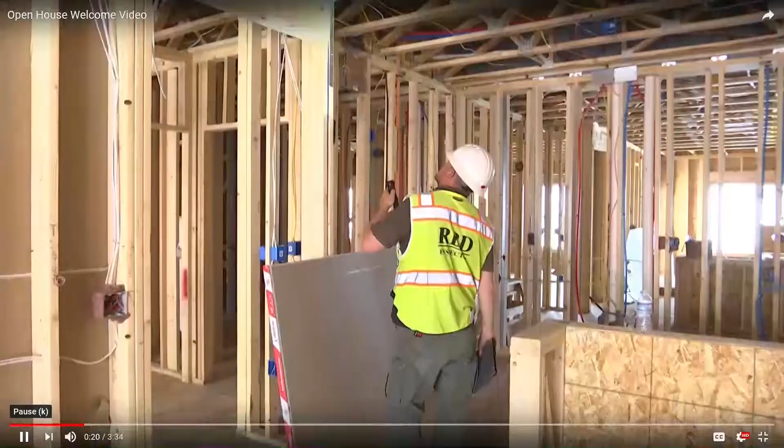PPRBD was started back in 1966 by an intergovernmental agreement, or IGA, between El Paso County and the city of Colorado Springs. As the Pikes Peak region grew, so did we. Today, PPRBD not only services El Paso County and Colorado Springs, but Fountain, Manitou Springs, Monument, Palmer Lake, Green Mountain Falls, and the town of Woodland Park in Teller County.

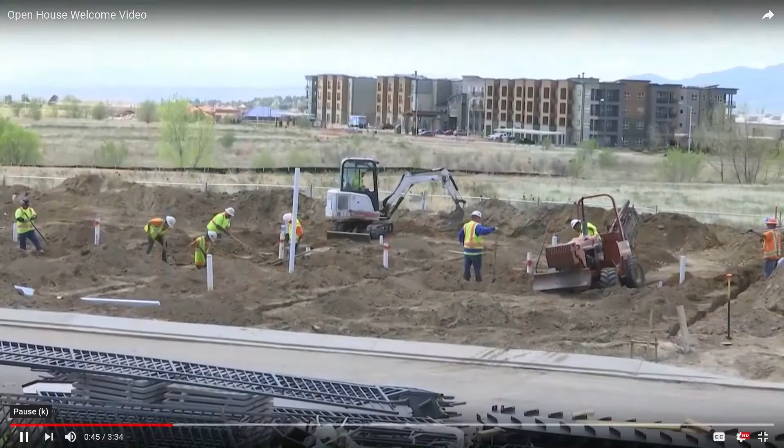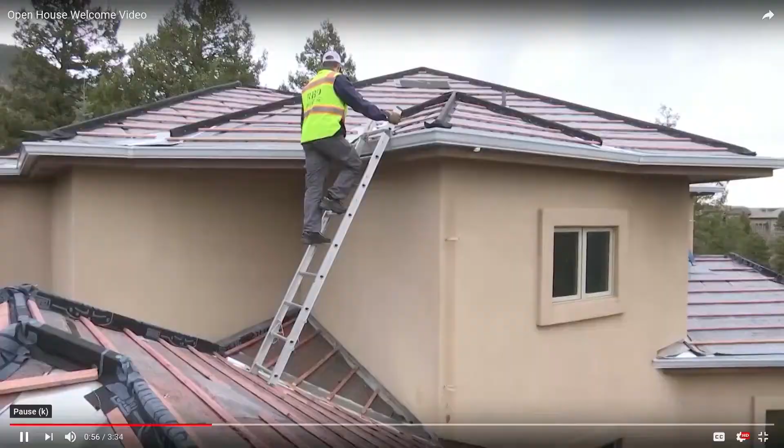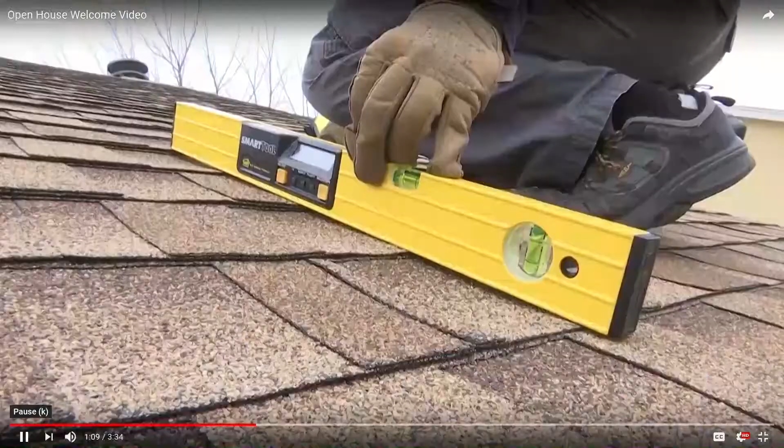So what do we do? Well, we make sure contractors have the proper licenses to do work here in the Pikes Peak region and ensure all work is done in a code-compliant manner, from plan review and permitting to new construction, remodels, and re-roofs. Our goal is to keep our citizens safe through efficient and the consistent application of adopted codes and standards. We do that by reviewing and inspecting the design, construction, quality of materials, use, and occupancy of all buildings and structures under our jurisdiction.

One of the best things about regional building and the way that regional building operates is the same codes are in place all throughout El Paso County, and the same expectations occur all throughout El Paso County. So it doesn't matter where a building is built, whether it's in the city of Colorado Springs or way out east on the plains, the same criteria applies and the same level of expectations and service is there.

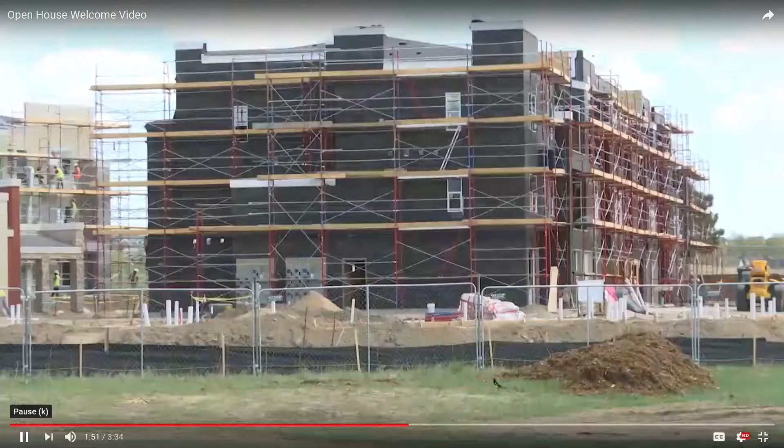The department is governed by the Regional Building Commission, a 3-member governing body consisting of 1 county commissioner designated by the El Paso County Board of County Commissioners, 1 council member designated by the Colorado Springs City Council, and 1 elected official chosen by the other member jurisdictions served by PPRBD.

Probably one of the biggest misconceptions about regional building is that we are the city or we are the county and that we get tax funding. That's actually not the case. We aren't the city or the county. We are a separate entity and we don't receive 1 dime of tax money. Instead, the department is completely funded through permit, plan review, and license fees.

With that said, we are proud to say that our fees have not been increased in 11 years, and we have some of the lowest building fees in the state of Colorado. In fact, when it comes to single-family homes, we have the lowest fees in the state, and compared to most of the other building departments, it's not even close.

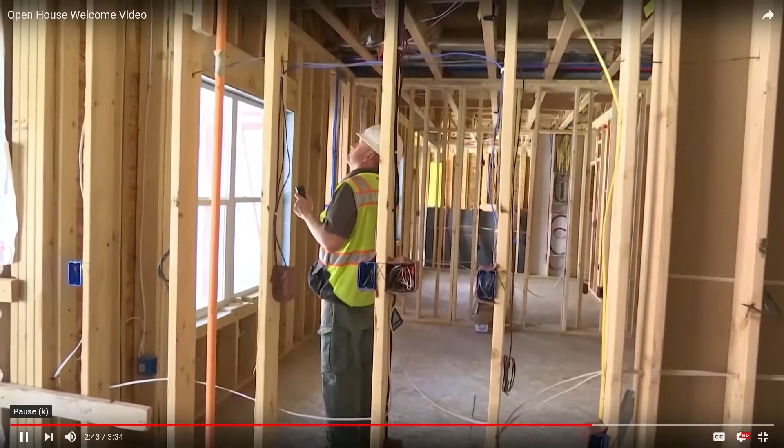Our low fees allow people to build and construct things at a reduced cost, and we've been able to increase efficiency throughout the years to be able to match the revenue that we receive. And the fact that we can offer outstanding service at a reduced fee over other building departments just makes us that much better, and we're very proud of that here at Regional Building.

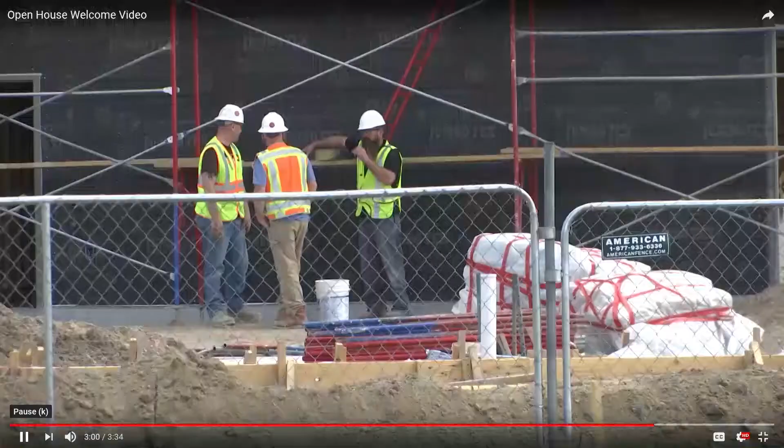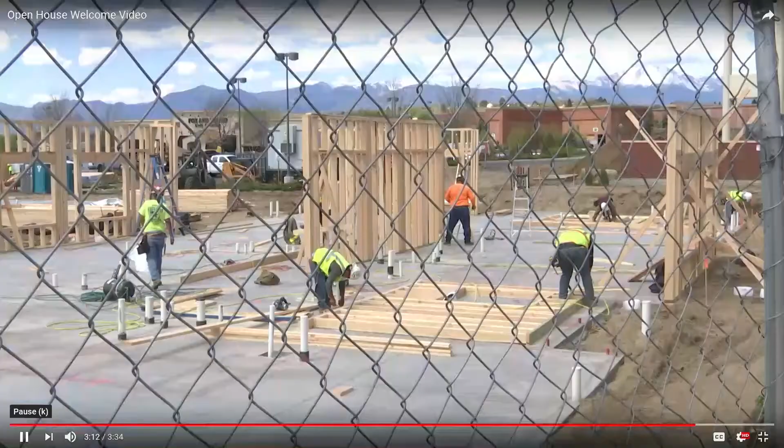It takes everyone in the community to keep our homes, schools, hospitals, offices, retail stores, and other buildings safe for public use. Building codes and safe construction practices help make it all possible. We hope to build on those safe practices today through education. The more informed homeowners and contractors are, the smoother the building process will go and the safer our community will be.

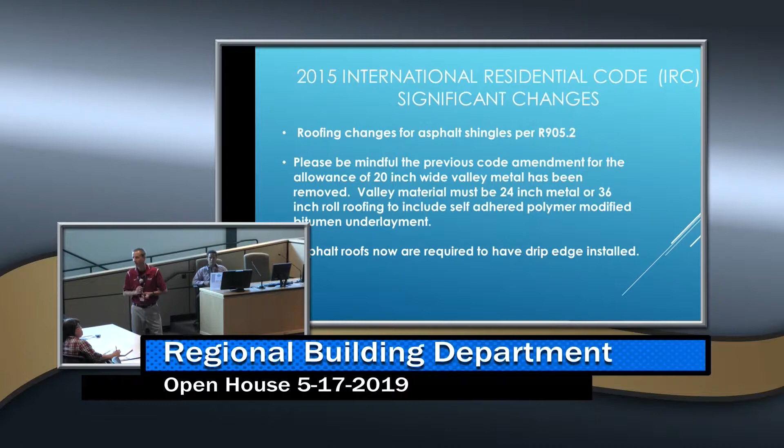All right. So here's my segue over to Jack. One of probably the biggest changes on our end with this most recent code adoption that impacts 1 and 2 family homes is this is the very first time that regional building has adopted IRC chapters 13 through 33.

So previous to this code, you would have built the house with the 2009 IRC. You would have put in your mechanical per the 2009 International Mechanical Code. Your fuel gas would have been regulated by another book. Plumbing would have been regulated by another book. This way, it's self-contained.

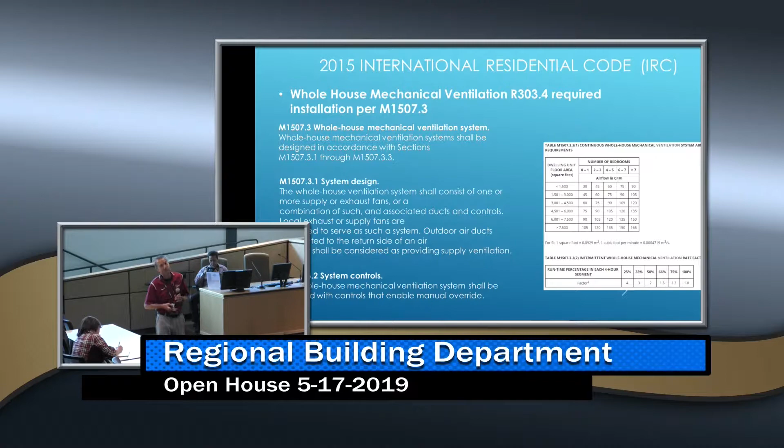Everything that you need to build a single-family home, with the exception of the energy code, is in one book. Hopefully, this has streamlined the process and made some of the requirements for single-family homes not as laborious as trying to build a commercial project. So with that in mind, I'll turn it over to Jack to cover some of the more significant mechanical changes.

Okay, one of our big changes on mechanical going to the IRC was the whole house ventilation system, which seems to... is figuring out how we want to do this whole house ventilation system. It can be done with exhaust fans, or it can be done with makeup air or intake air to the return on your furnace system. So you have a couple of choices. We're seeing it done both ways. We're seeing more of the intake into the returns on the furnace.

If you do a 6-inch outside air into the return on your furnace, that counts as 90 CFM for your whole house ventilation air. The other part of that is you have to have a switch, a system control, as you see from the comment at the bottom there, to shut this system off. We get a lot of questions about that control.

One of my senior inspectors came up with one of the best reasons for having that control. We had the fires here at one time in Black Forest and over here on the west side of town. If you had that whole house ventilation system as an intake and you're sucking that smoke in, you might want a way to shut that off while that fire's going on, you think?

I used to tell people that one of my reasons that you might want to do it was to match what old code was. Your whole house ventilation used to be just windows that you could open. But you had the option of shutting your windows. You didn't have to leave them open all the time. So to me, kind of the same difference.

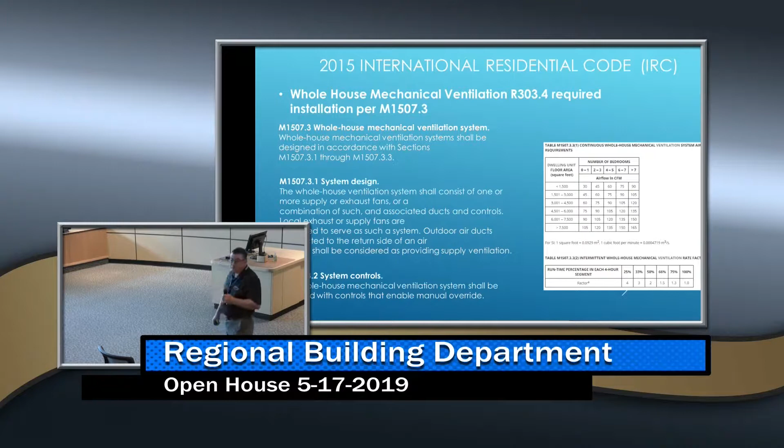Now again, that can be done with that makeup air into the return, or it can be done with exhaust fans. We have some contractors who are using the exhaust fan in a laundry room or a central part of the house that does the amount of CFM they need to do the whole house. And then they have their control for that fan with markings on it that says whole house ventilation control. And that's allowed, and it's all exhaust then.

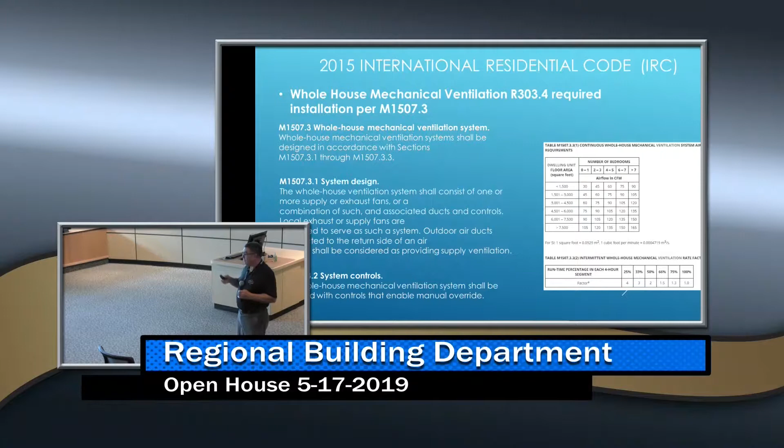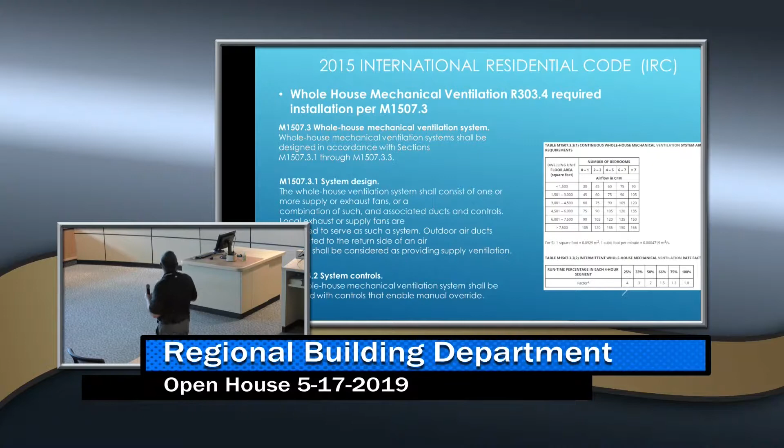Or you can mix them up. You can have part of it done by exhaust and part of it done by makeup air. If you get a house big enough where you need it all, you can do it that way. There is a chart up here. I'm sorry, I'm having a hard time getting in a spot where I can see this up there.

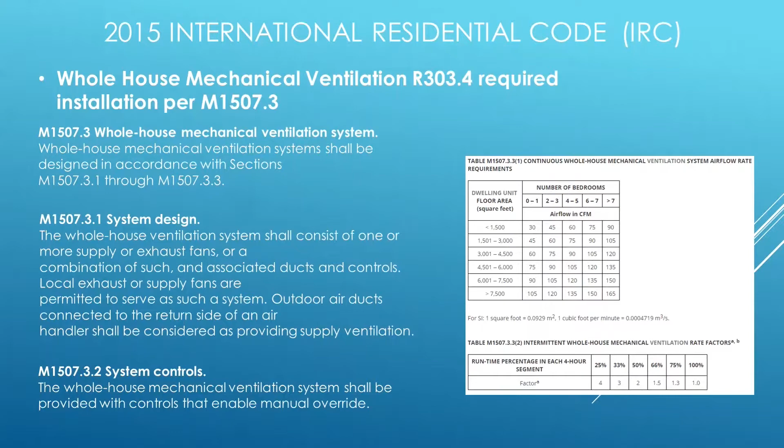This chart is in the International Residential Code, and it gives you the square footage of the house and the number of bedrooms, and then how many CFM you've got to be able to move to meet your whole house ventilation. And it's a small number if you're going to run it full time, and that's the way most people are putting it in. Now, you can put it in as an intermittent system and control it that way, but then you've got to use the bottom part of this chart and do your multiplication of what you're trying to get on those.

If we took a house in that 1,500 to 3,000 square foot area with 2 to 3 bedrooms, we would have 60 CFM we've got to move. But if we only wanted to run our whole house ventilation system as an intermittent piece for a quarter of an hour out of each hour, we'd have to move 240 CFM. Whereas we could put a fan in that moves 60 CFM and leave it run all the time, and then if you wanted it off, you could shut it off with the override switch.

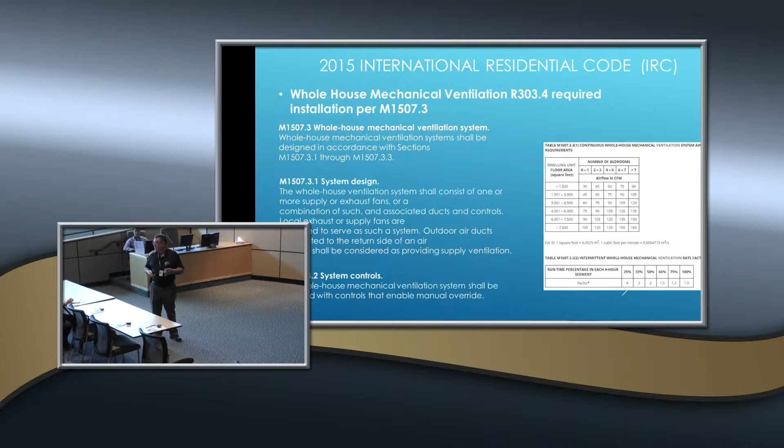So this has lots of options in it that you can use. And I think most of you have gotten that figured out now pretty good. We're not having quite as many questions on it because we've found ways to make it all work out for you. Are there any questions about that? I like that because that usually brings me a lot right there. So

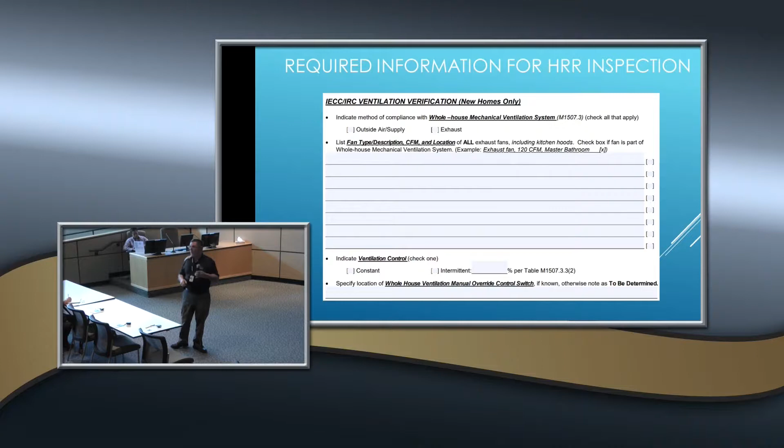Now, you're going to have more fans than that in your bathrooms and stuff, but we need those CFMs so that our inspectors can look at that when they're out there inspecting that house, because you've got to size those ducts by the CFM of those fans. So when they're looking at the duct sizes, if they don't have this sheet, they're going to have to partial your HRR, and then you're going to have them called back another day, and that just slows your job down, and we don't want to do that. So by filling this out, it may gain you a day on inspections, keeping that job moving. Because we like to see that job move forward too. We're really not in it to hold you up.

Down at the bottom of this, we want you to indicate the ventilation control, if you know. Is it going to be a switch in the basement? Is it going to be a switch upstairs? Is it going to be in the coat closet? We want to know where it's at if you know. If you don't know, just NA it, and we'll be asking as we go along where that's at, and we'll have to know by final where it's going to be, that main control switch to turn the whole house ventilation system on.

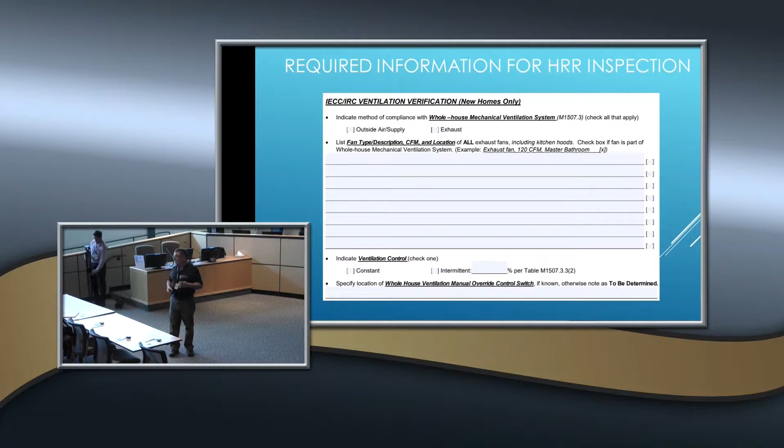And we ask you to mark, is it going to be a constant or an intermittent? And again, most of what we're seeing is constant. Any questions? Okay.

The next thing is the clothes dryer. This ran into an issue when we first started into this new code adoption because we were asking for fasteners on putting that duct together for the clothes dryer. A lot of you didn't like that because trying to find a screw 1/8 inch long was basically impossible. 1/4 inch long was impossible. We found out the shortest you could get was 3/8. That's going to go into that duct a little more than 1/8 of an inch. So you could use the pop rivets, but not very many people like using pop rivets anymore.

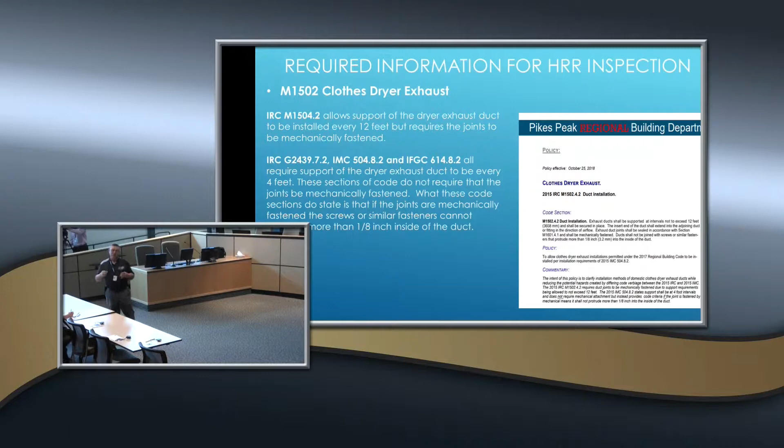So we got this study in code, and we found that the mechanical code and the IRC had a conflict. So we made a policy, and this policy is on our website. The policy simply gives you a choice of using one code or the other. If you use the IRC, you're going to go at 12-foot intervals on your supports, and you're going to have to fasten your joints. If you use the mechanical code, you're going to go at 4-foot supports, and you'll have to use no fasteners to fasten the duct, just the tape and/or mastic, whichever you use.

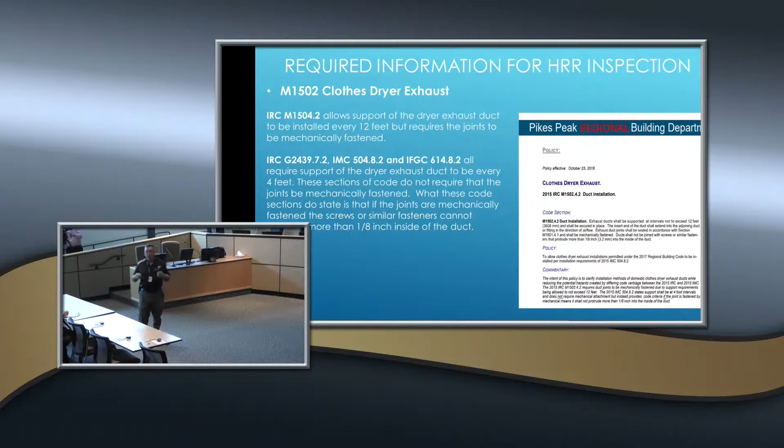Essentially, all it did is put you back to where you could do it as you were doing it in the 09 code. So you don't have anything different on it. You support it every 4 foot. Don't use fasteners on the joints. Just tape it. You've got to tape or mastic either way you do it. But if you do 12-foot supports, you will have to put screws or rivets in those joints for us.

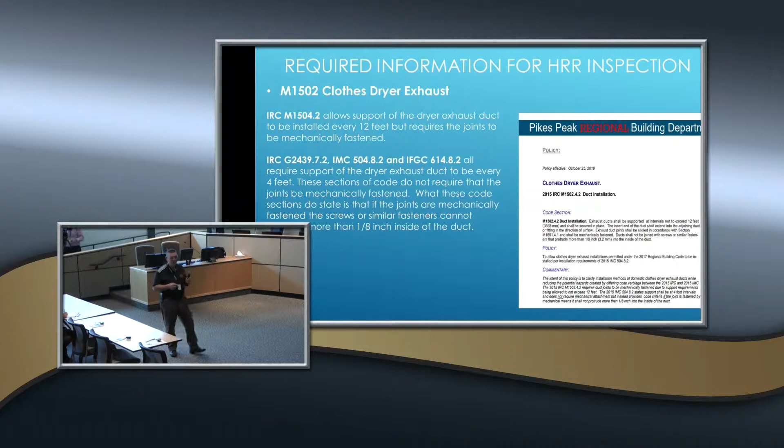Yes, sir. So you are allowing the 3/8 screws, is that correct? You can use the 3/8 screws if you want, yes. If we went the IRC method at 12 feet, you're going to allow 3/8 even though it's more than 1/8 into the pipe? Yes, sir. It's the shortest you can get. Any other questions?

Oh, John has this thing real fancy, and I'm not a fancy guy, so you'll have to bear with me.

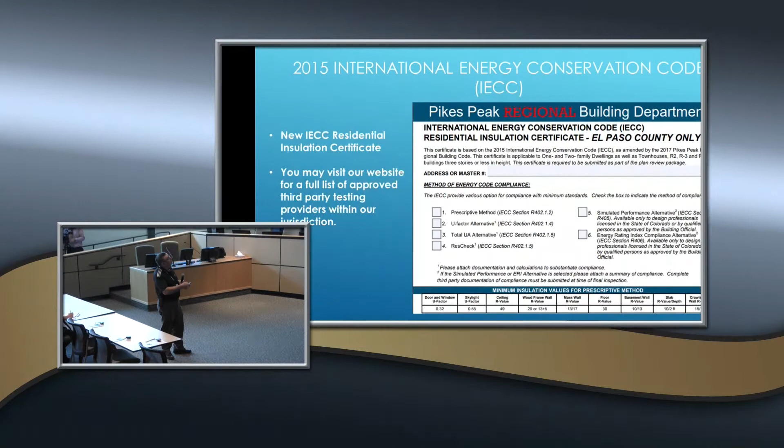You're still pretty limited. Whoops, I hit the wrong button then. Jump this way back. John may have to come and help me now. There we go. Sorry about that.

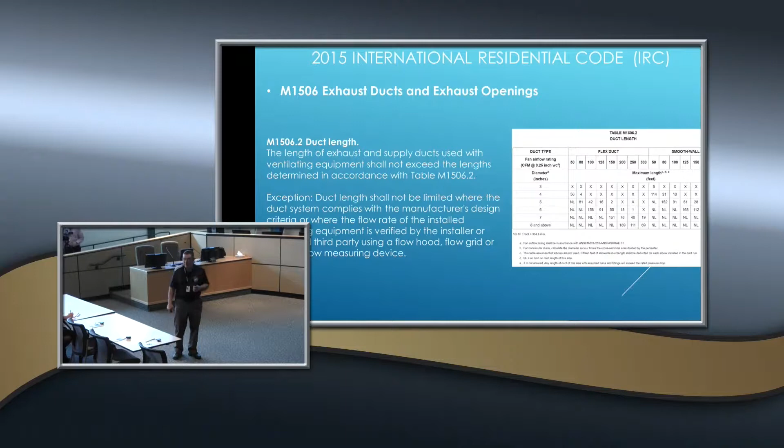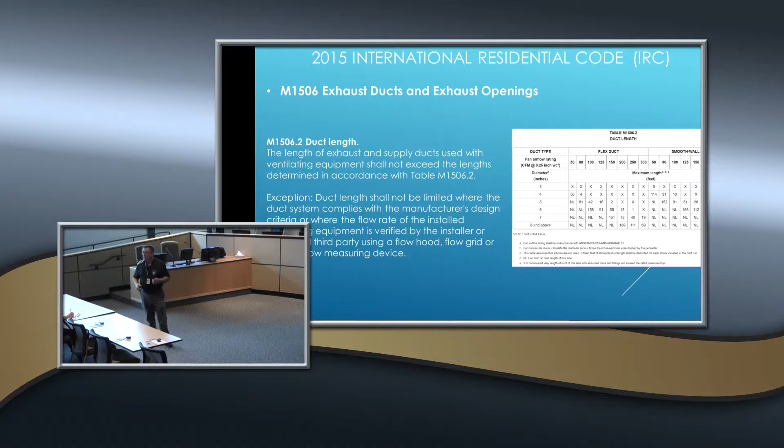But anyway, as you look at this, you'll see these are pretty short distances. You'll also see that footnote C says that elbows count as 15 feet. So you'll want to be talking to your electricians, who typically are the ones who mount your bathroom fans, to get them to turn that so that the duct opening is pointed to the outside wall. You want to keep that as straight as you can, because if you put 2 elbows on there to get out of that can, that's 30 feet. And if you're limited to 50 feet, you could be pretty tight on getting out of there. So that's something to pay attention to, the elbows.

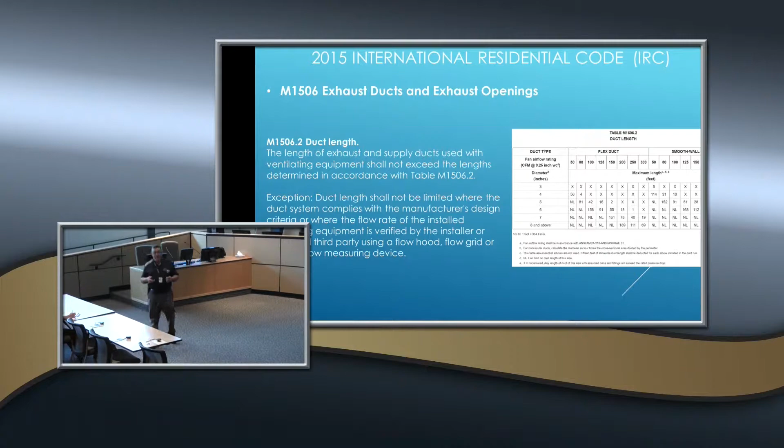So this chart, I've done it for a few folks that have come in and talked to me about it. I've made copies of it where they can carry it with them. It just makes it a lot easier for your installer out there to be able to look at that and see what he's doing.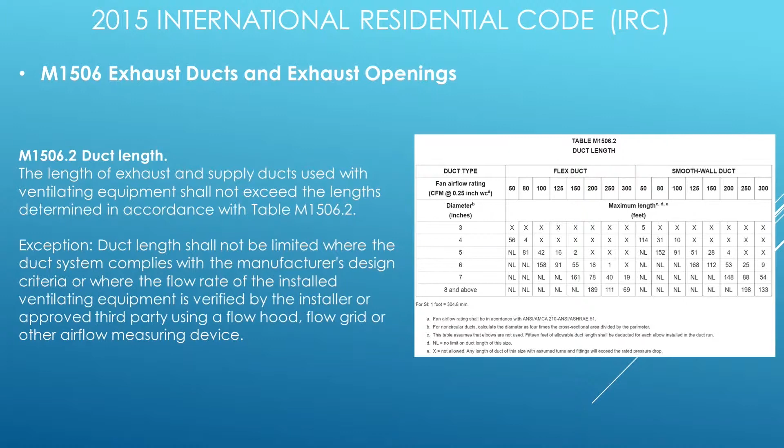And I believe we're back to John a little bit here. All right. Oh, I'm sure it'll come back to you a little bit there, Jack.

The prescriptive method, U-factor alternative, total UA alternative, REScheck, simulated performance, or ERI, the energy rating index. So all 6 of these have different requirements and different paths that you can use to prove that the home works. The 2 that we see the most of are generally prescriptive and simulated performance.